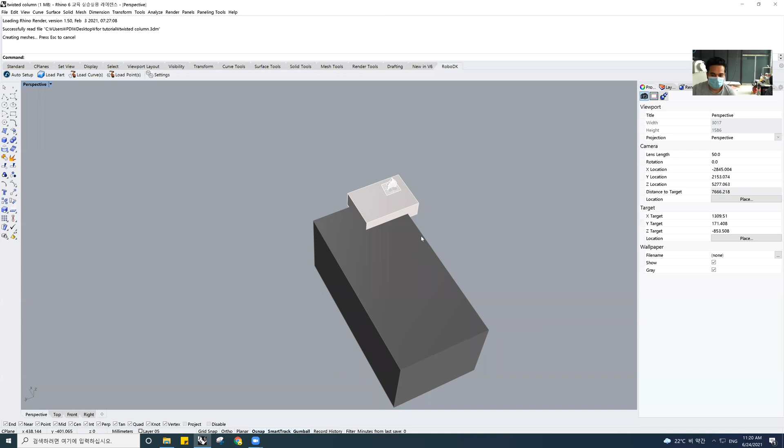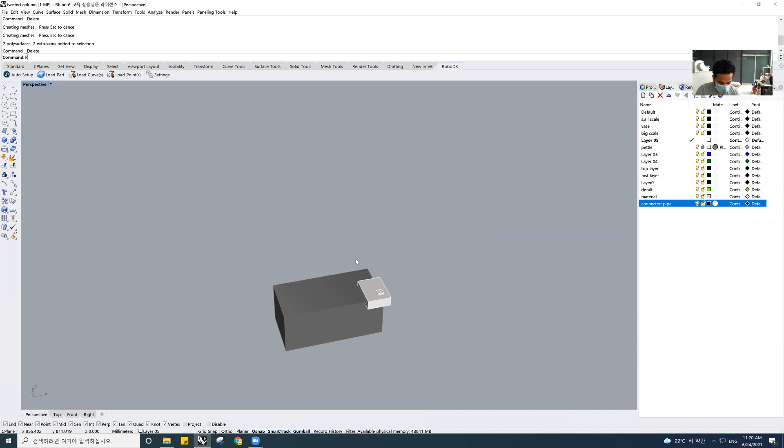So let's remove everything from here, and we're gonna build it from the start. Let me delete all. Select all, delete. Okay, so we are good. So I'm not deleting this one because this one I measured first and then made it. If I do these things also from the start, then it will take a lot of time.

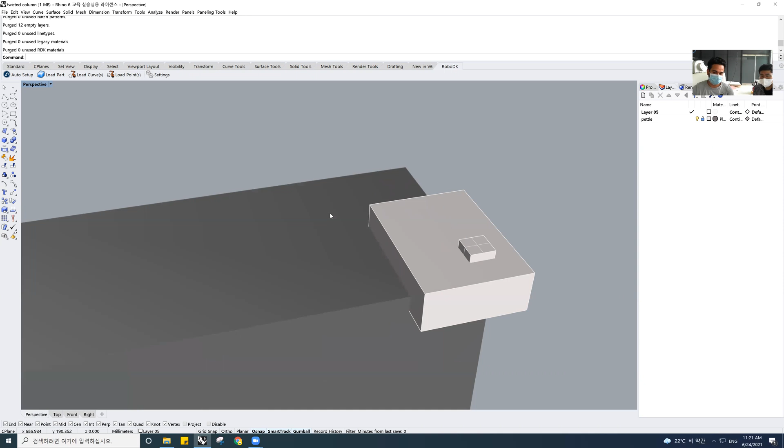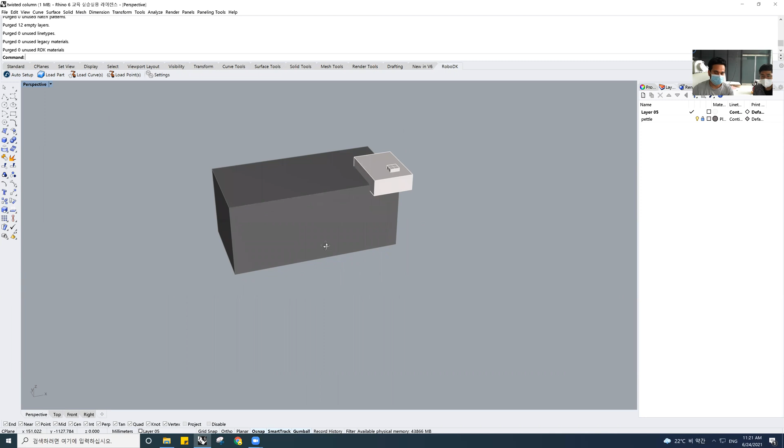So I need to measure everything from the center of the robot, like where exactly the robot is located in here, and then this thing, and then this is the raise for the printing that I made. I didn't want to delete this, so that's why I locked it, so I'm not able to edit it, and that's good. And the robot will be in here. Let's say we make a line at 0, 0, 0. So the robot center position will be here, and then facing like this way.

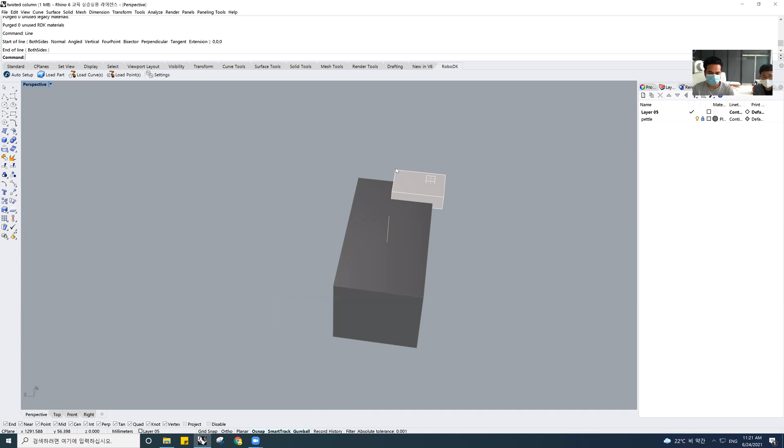Now starting with making the 3D, let's say we're going to print a 3D cube. To print the 3D cube, we can either do the outer layer and then go all the way to the top, or we can fill everything and go to the top and make a full solid box. And also we're gonna see, let's say, how we can glue the outer line of the box, or carve the outer line of the box.

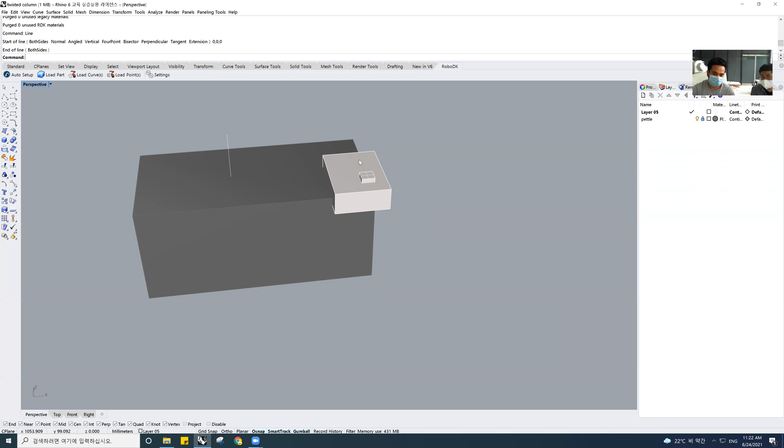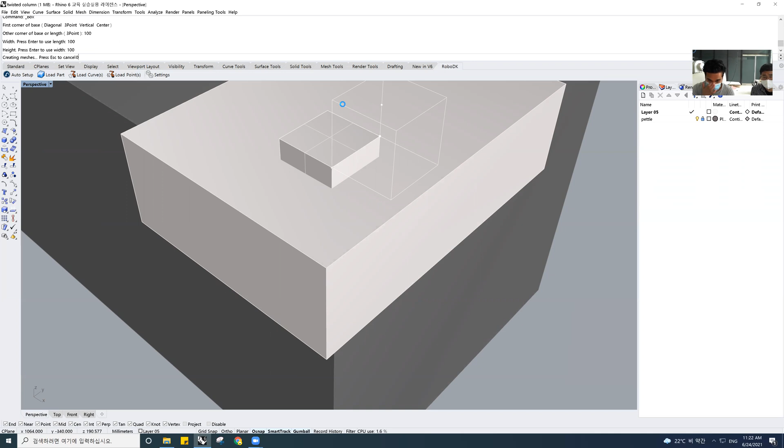So first I will start by making one box. I will just say first corner, and then 100 mm, and then the height will also be, let's say, 100 mm. So I have this box, and this raised surface, if we see on the real robot, will be like this one. So this is the raised platform. The robot is in here, and then the robot center will be there.

I found that the raised platform is around here, and then we're gonna find exactly where the positions are by using the robotic method also. We'll find the points where the printing will be done, then put our rectangle raised platform above there, and then start the printing. So I will do that in the video also.

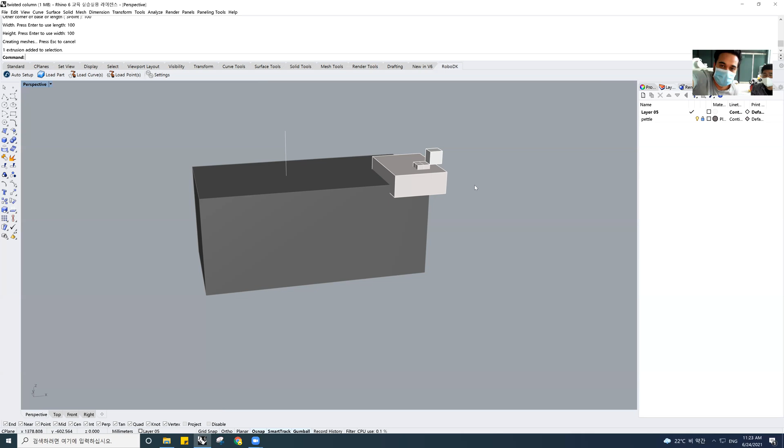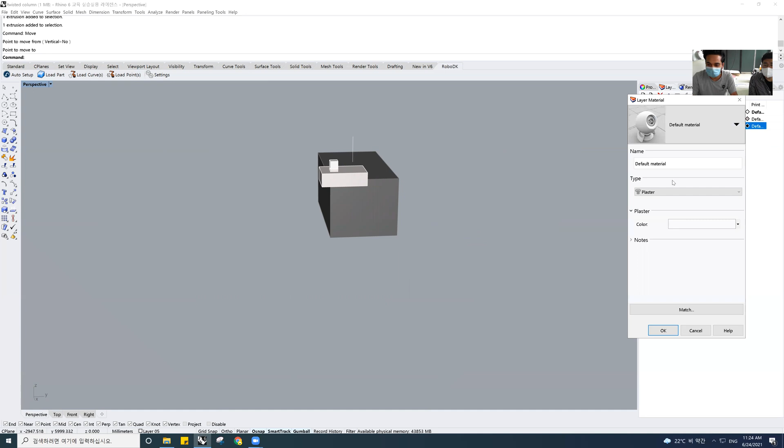Okay, so first let's suppose that the cube will be here. So this is the cube, and let me change the color by making a new layer. The layer will be cube, and I will change the color of the cube to a little reddish. Okay. We don't need this. This is just for reference, so I will delete it.

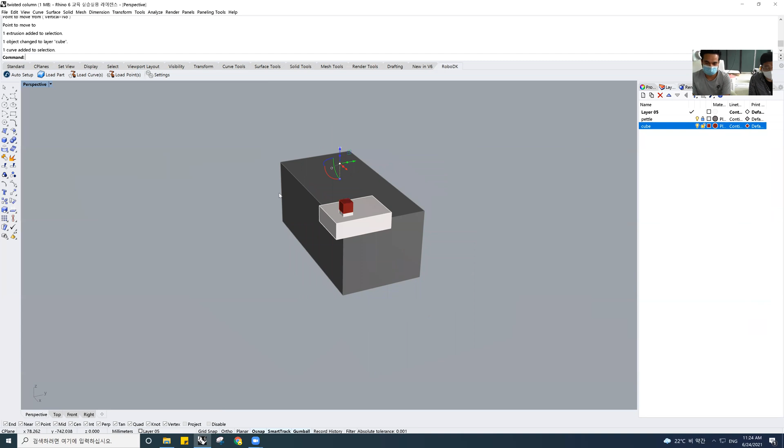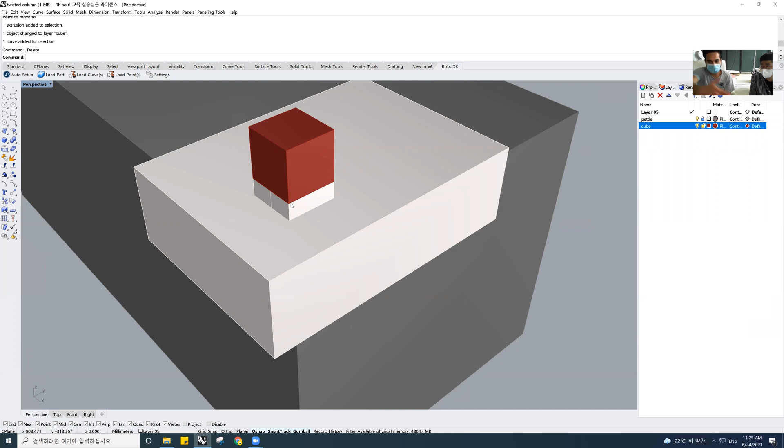The first thing that we need to do is find the position. The position means these 4 points or 2 points, because since it is a square and we know that, if we have these 2 points then everything will be fine. Everything will go through that line. Why 2 points? Let's say we need to make a rectangle, right? If we see from the top view, we need this 1 point, and then we need another point. And then this point will be parallel, right?

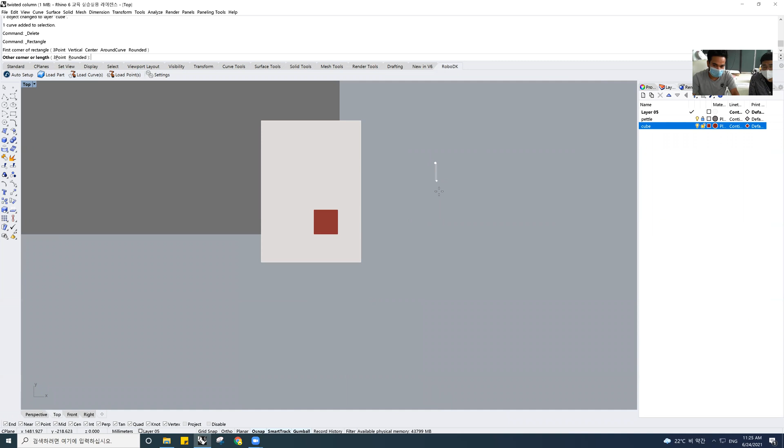In this line, if we see x, y, z here, at this point x is 1476 and y is minus 144. If you go directly down, you see that y didn't change, right? So since this length is 100 mm, we don't actually need this length, because if we have this point, then we also have this point. It is just a parallel, straight line. So if we have this point and this point, then we have the place for the cube, and we can put it exactly.

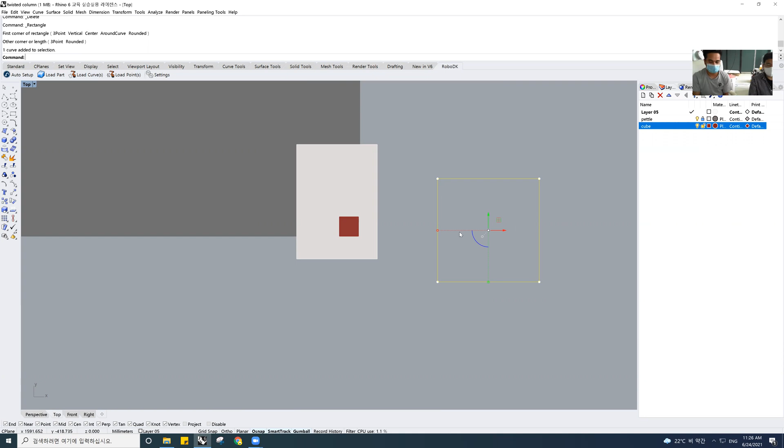The sad thing is we cannot connect the internet and the robot at the same time because of the internet issue. So how can we do that?

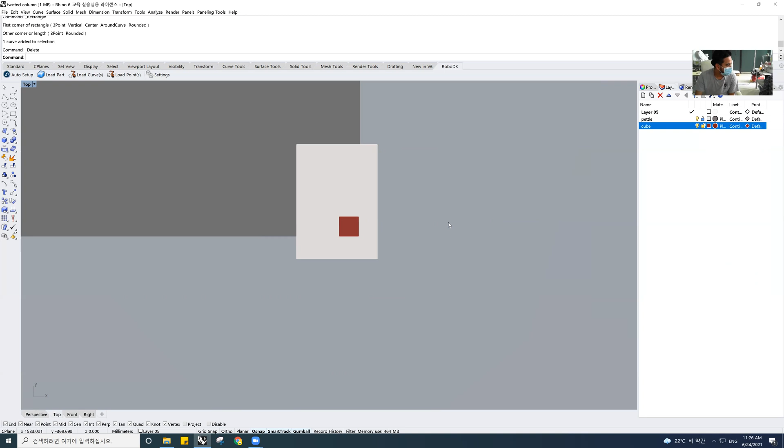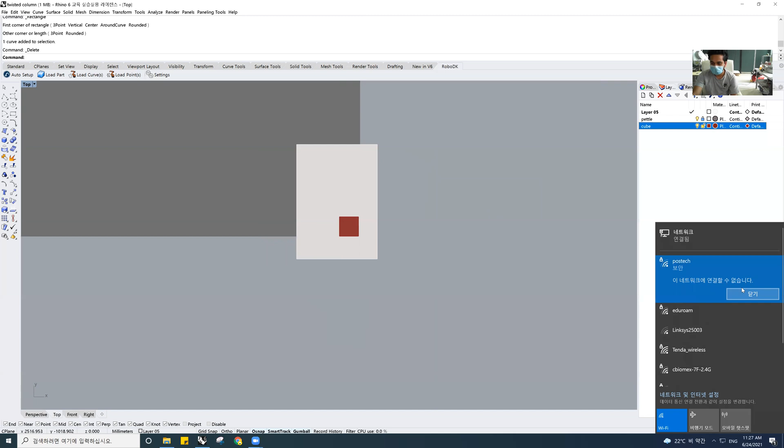How about using Wi-Fi? Wi-Fi connection for here. Yeah, let me try. Usually it does not connect. What is it? I can't use it. What happened with that? I don't know. The wireless is also this one, so it will not work. Oh yeah, of course, it doesn't have any internet. So the only option is... Also, forget, which one is forget.